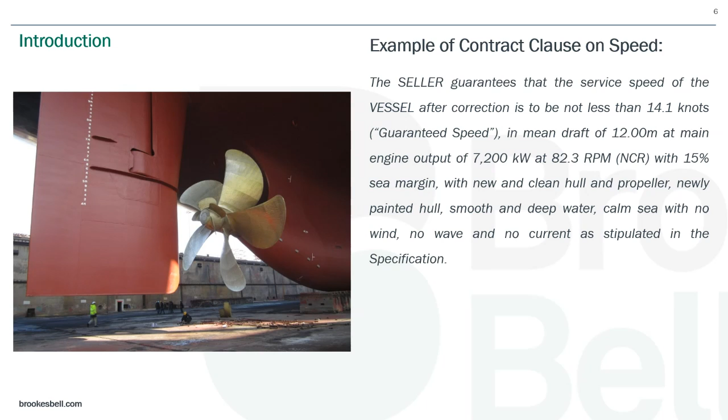All right, Kieran, I'm taking the wheel now. First of all, I introduce the concept of the engine layout diagram. The main propulsion engine is actually the power station of the ship, providing mainly the ship propulsion and also some other energy necessary aboard.

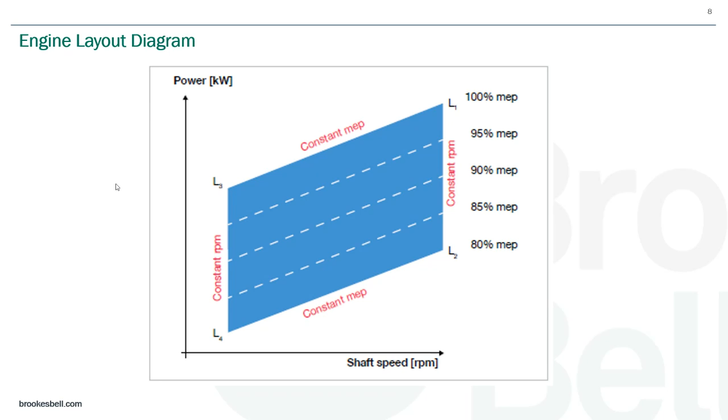Once SMCR is established, the power versus RPM curve passing through SMCR or point MP is called the engine layout curve. It is the engine operation curve, assuming some additional power due to real-life conditions, which is known as heavy condition. In this so-called heavy condition, the engine should operate on this engine layout curve. A propeller operating on the right side of the engine layout curve is in a light operation condition, and on its left side means overloaded operation condition.

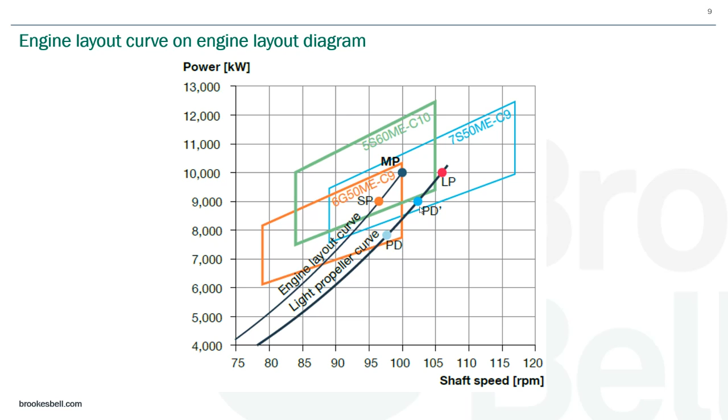The heavy and light propeller curves run almost parallel, and at the same power, the RPM is higher on the light propeller curve. This is due to the light condition under which the propeller is running, meaning less torque is required. For example, at point LP on the light propeller curve, the engine produces the same amount of power as in MP, but at a higher RPM. Points PD and PD' on the light propeller curve are propeller design points, which I'm going to explain further in the next slides.

Engine operation margin, or simply engine margin, is a power reserve assumed for economic engine exploitation, meaning low fuel consumption, low greenhouse gas emission, and low engine maintenance cost. It's actually a reserve assumed to protect the engine.

This reserve can be used, however, in an emergency situation. The idea is that in normal condition, to not operate the engine at its maximum power, SMCR, I mean on the point MP on the engine layout curve or point LP on the light propeller curve, but at somewhat reduced power, usually something between 10 to 30% of SMCR.

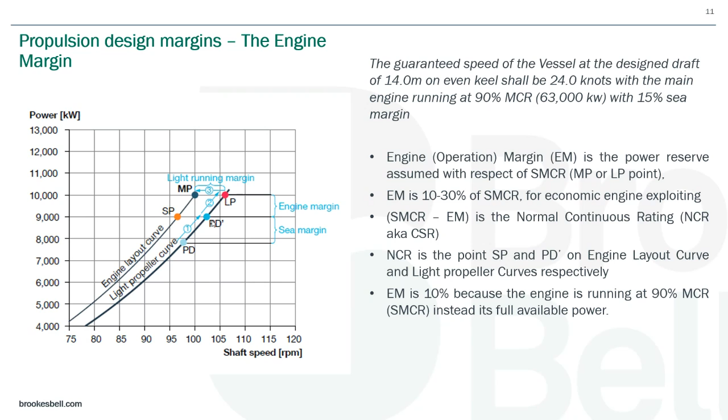15% being used. Here it's a debate. In the past, 15% was most frequently used. Today, a figure as 10 could be found as well. This reduced power defines the normal continuous rating, or NCR, sometimes called continuous service rating, or CSR, which is the power on point SP and PD prime on the engine layout curve and light propeller curve respectively.

Propeller light running margin, or LRM, is a propeller additional RPM assumed in ideal condition on top of that in heavy condition, expressed on the propeller design point on the light propeller curve, PD or PD prime. It is an RPM reserve assumed in ideal condition to ensure that in heavy conditions the engine will operate on the engine layout curve. If this does not happen, and the engine were to operate on the left side of the engine layout curve, once the sea margin is applied, the engine will be overloaded.

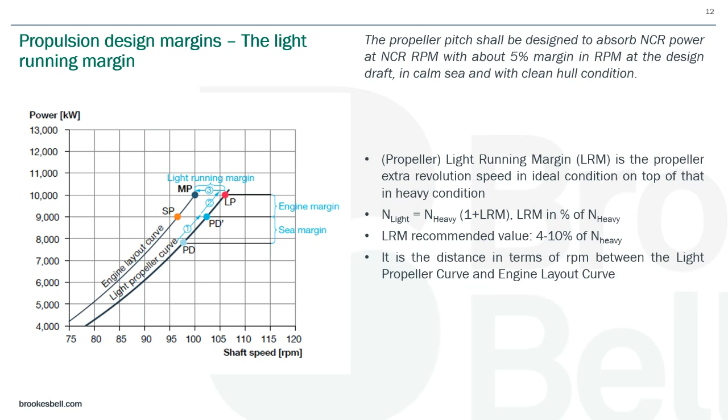LRM is expressed as a percentage of the engine RPM on the engine layout curve. Engine RPM on light propeller curve is calculated by this relationship, where LRM is expressed in percentage. The values recommended today are 4 to 10%, which are greater than the former recommendation 3 to 7%. These recommendations are both from MAN Energy Solutions, which is the largest engine manufacturer. I can describe this relationship. So N light should be N heavy times 1 plus LRM. The relationship is visible on the right side of the diagram in this slide.

of an ideal condition. The ship speed in ideal condition is called trial speed, and that with sea margin assumed is called service speed. Both are contractual items mentioned in the building contract and technical specification document. Here I must say that the most frequently used is the service speed, because this is more relevant than the trial speed, which is only achievable in ideal condition.

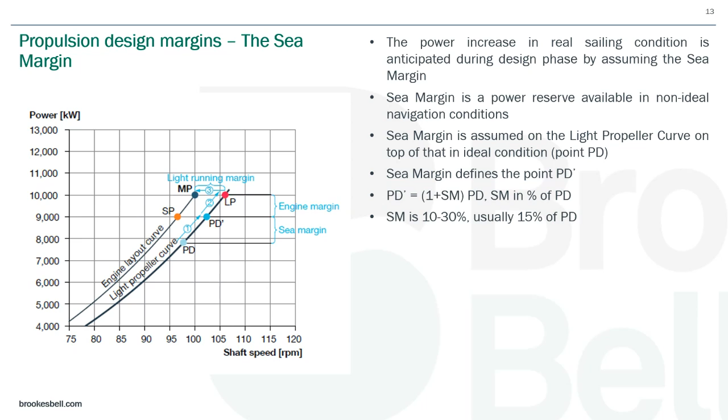Now I'll hand the microphone to Kieran to continue to explain the importance of the model tests and sea trials, which are part of the propulsion design process. Kieran, please. Okay, thanks for that, Bogdan.

I'm now going to talk to you first about model testing, which is an important part of the design process. It's when the hull form is finalized and the propeller is designed, and this is to ensure that they operate efficiently and also meet the design requirements in terms of installed power. So although it's a design topic, it's important to understand model testing if you're going to understand the process of sea trials and verifying the as-built design, which is an important part of the ship delivery process.

The model basin itself is essentially a long trough of water indoors. Larger basins are anywhere upwards of 200 to 300 meters long, and they can be very narrow if they're specializing in propulsion testing. A propulsion basin can be as narrow as 10 to 12 meters. And this is fine because essentially we're just testing the vessel going forward. We're not doing maneuvers, etc.

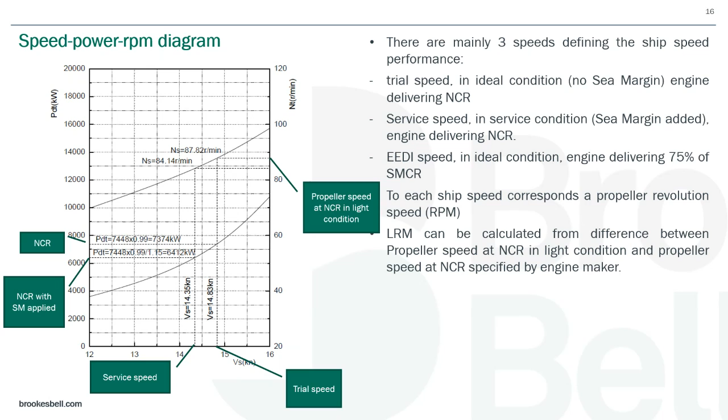Okay, just to make some final closing comments on the speed power diagram, speed, of course, is one of the most important parameters of the ship. Normally defined in the contract, but LRM is always specified in the specification or any of the contracts I've seen. The implications of a ship which is too slow or demanding too much power are obvious, but the LRM effect is a little bit more subtle.

A ship with a low LRM can have difficulty punching through adverse weather, and it can accelerate sometimes very slowly, which causes trouble with maneuverability, and sometimes means that the engine shaft is spending too long inside the barred speed range when it's going from maneuvering or from slow to full speed ahead.

So there's an analogy often made between the gearing of a car and a ship's LRM. Essentially, a vessel with a low LRM is similar to a car which is stuck in high gear. It can travel at high speeds, but it lacks acceleration or it lacks ability to go uphill. And in a similar way, a low LRM ship has difficulty punching through difficult weather or getting up to speed, although in ideal conditions, it can actually achieve the speed once it's there. But anyway, as mentioned by Bogdan, it can actually be corrected if it's found to be deficient in a sea trial.

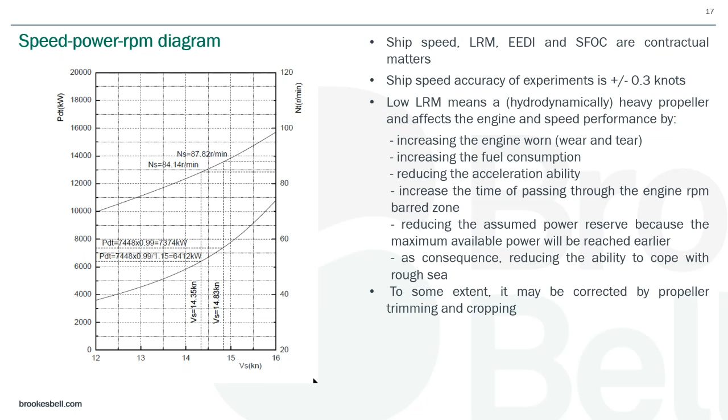Okay, so we now come to the sea trials. The sea trials are an important part of the verification process of a new design, and it's here basically where the designers finally test it against those important aspects of the contract and specification. The part of the sea trial I'm talking about here is the speed power sea trial, also known as the progressive speed sea trials. There are, of course, a large number of tests that are done at sea trials, such as endurance trials, testing of machinery for the ship. But the speed power sea trial is when the hydrodynamic performance of the ship is actually tested.

The conduct and analysis of the sea trial is typically done to a standard. The most commonly applied is the ISO, International Standards Organization, 15016. The 2002 version of that was used for many years and was recently updated in 2015.

The recent update was at the request of the IMO's Marine Environment Protection Committee, which was implementing at the time the EEDI legislation. Because the EEDI takes the input power requirements of the vessel, it was a requirement to make a robust standard that can be consistently applied.

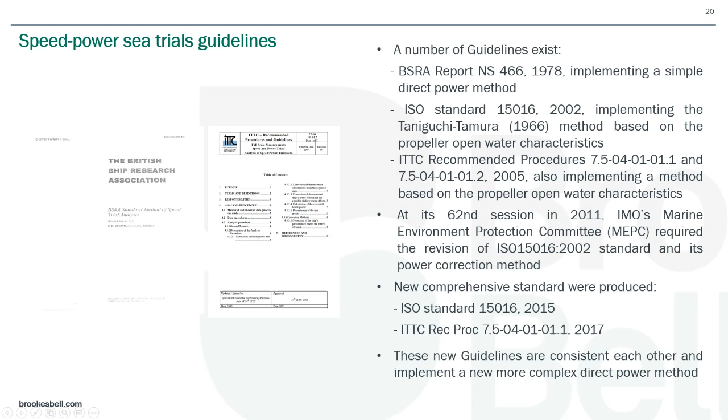So the ISO 15016 defines how the speed trial should be conducted, what the maximum weather conditions are, the water depths, duration of runs, etc. It requires that reciprocal runs be performed. So that's basically one run with the wind and one against the wind. And it specifies various measurements which are required. That's the RPM of the propeller, and also the torque applied to the propeller. Torque is normally measured by putting strain gauges on the propeller shaft and measuring the material stress.

So once all those measurements are performed, the ISO standard defines how they're to be corrected. Essentially, as Bogdan mentioned, rarely can a sea trial be performed in ideal conditions, meaning absolutely no wind and absolutely no waves. So they have to be removed by calculation, and that's defined in the ISO standard.

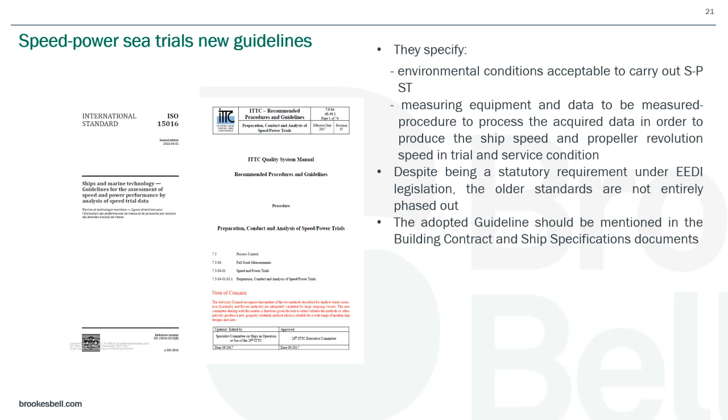In the past, the methods of correction used were fairly widespread. Shipyards and testing companies would have their own software or their own spreadsheets for performing these calculations, and it led to various differences between the various institutes that were performing these tests. So as part of the standardization of sea trials, the developers of the newest standard, which was the STA group, a subgroup of the ITTC, developed software which they called STAIMO.

The leaders of the STA group were MARIN in the Netherlands, and essentially STAIMO is their software, although it's freely distributed. The results of the speed power sea trial are entered into STAIMO, and what comes out are the corrected sea trial results. So although it's been a very good step forward and widely adopted in the marine industry, I'll mention one or two issues that are arising later in this presentation, but STAIMO is a very good step forward with standardizing sea trial performance.

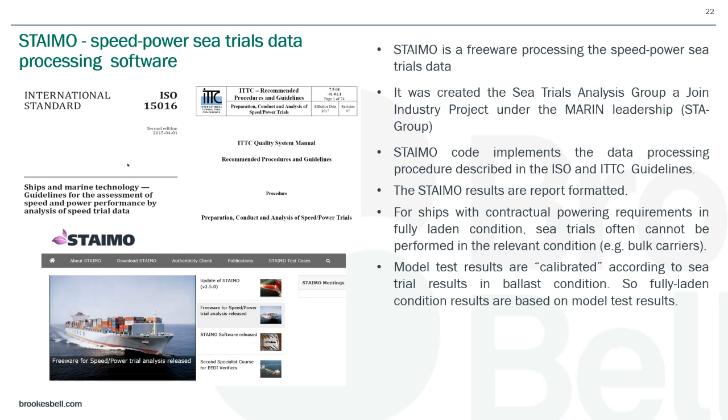And just to show you briefly what the end result is, I show example outputs from STAIMO. This is essentially the same curves we saw earlier for the model basin, except these are for sea trial, corrected for the effects of wind and waves, etc. STAIMO produces these three plots rather than a combined plot, but the same information could be taken from these plots. STAIMO also provides the various parameters required in the contract, such as LRM and service speed, as output, so you don't have to read them from these diagrams.

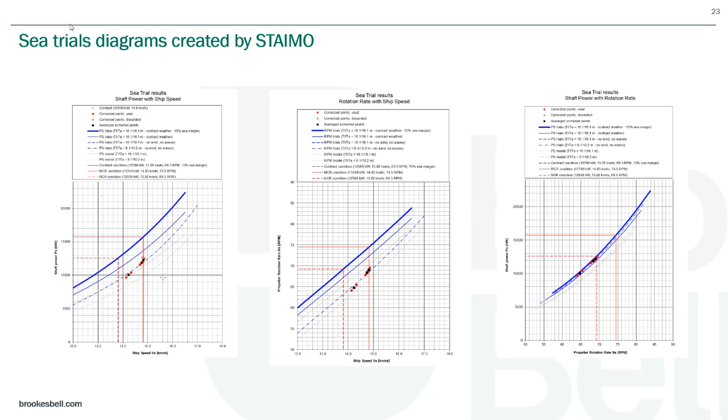So to make some concluding comments on what the state of the art in the industry is in terms of the conduct and analysis of sea trials, as mentioned previously, the adoption of ISO 15016:2015 and STAIMO have been very positive in standardizing the approaches.

However, we're still seeing shipbuilding contracts which specify other correction methods. Even the BSRA 1978 method is sometimes applied. This is despite it being a requirement of the MEPC resolution 261/68 for the EEDI calculation, which requires the latest ISO standard to be used.

There are other aspects which are not quite following the ideals of the 2015 version, and that's the process of model trials. The standard requires that model tests be done by the propeller load variation method, sometimes called the British method, and that basically requires that for every single ship speed, there are a number of runs done at different propeller revolutions. And that extra data is required to be used in the newest version of the standard.